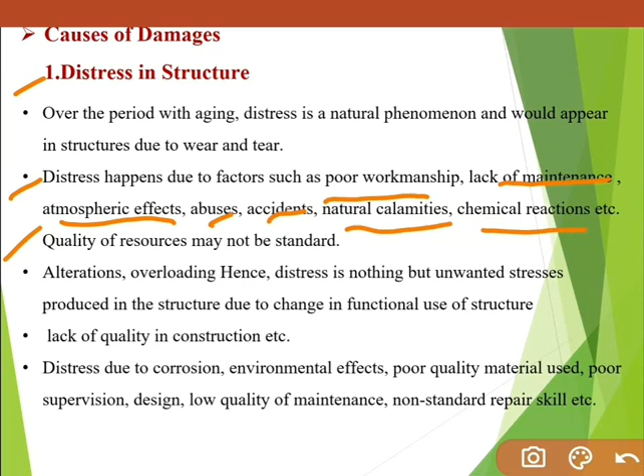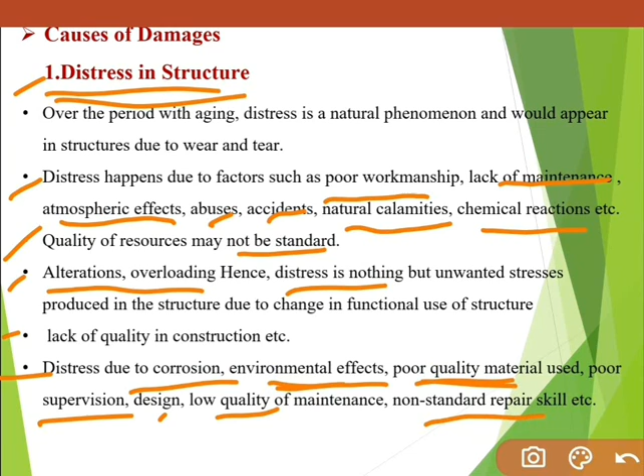Quality of resources may not be standard. Whatever resources you used while building your structure may not be standard. Alteration and overloading. This may also be a cause of the distress, and it increases the unwanted stresses which cause distress in structure. Lack of quality in construction. If you are not doing proper quality construction, it may tend to distress in structure. Distress due to corrosion, environmental effects, poor quality material used, poor supervision, poor design, low quality of maintenance, non-standard repair skill. So here are some additional causes of distress in structure. Okay, this is about the distress in structure.

Now let's see about the earthquake. This is the second cause which may damage our structure. Earthquake means motion at the base, and if motion at the base happens, the base of the structure moves, but the structure has a tendency to stay in its original position due to inertia. Because of the inertial property, the structure tends to stay in its original position, but its base moves because of the earthquake waves. So because of that, lateral pressure comes on our structural elements.

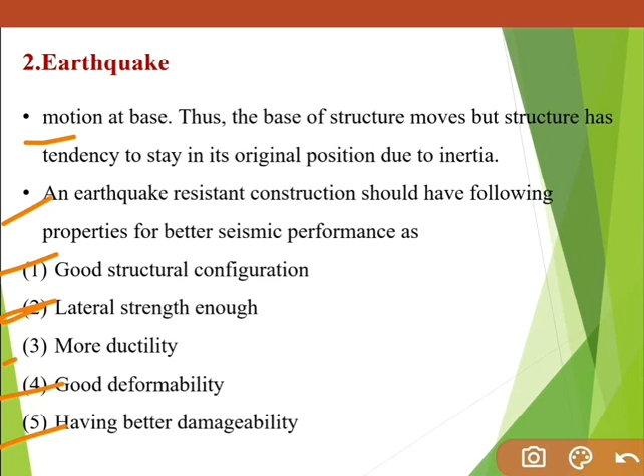An earthquake resistant construction should have the following properties for better seismic performance. If your construction comes under a seismic zone, our structure should have the following properties. Good structural configuration. Lateral strength should be enough, because if an earthquake happens, the structure will tend to move laterally. So that's why we have to provide a structure which is firm in the lateral direction. More ductility, the structure should be more ductile. Our structure should also be well deformable, and should have better damageability. So this is the second cause of damage.

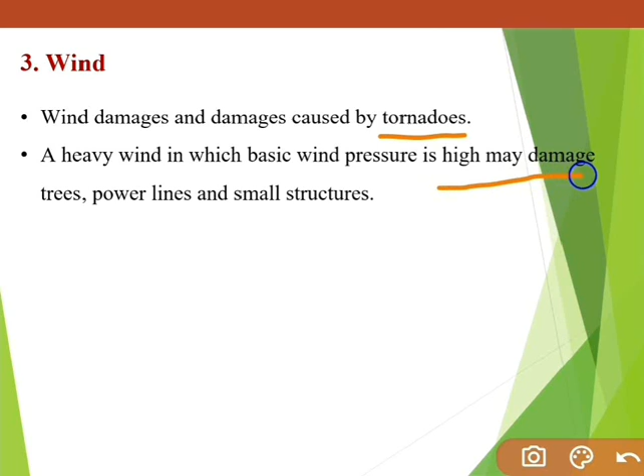Third, wind. A structure may get damaged because of high intensity wind, or by tornadoes. Tornadoes means high intensity wind. A heavy wind in which basic wind pressure is high may damage trees, power lines and small structures. So heavy wind may cause damage to trees, power lines and small structures.

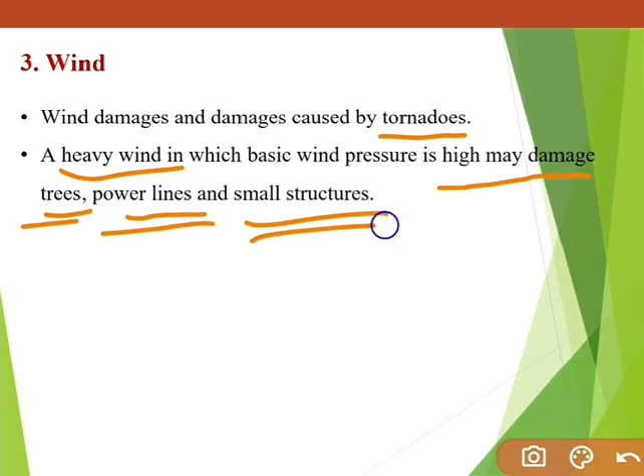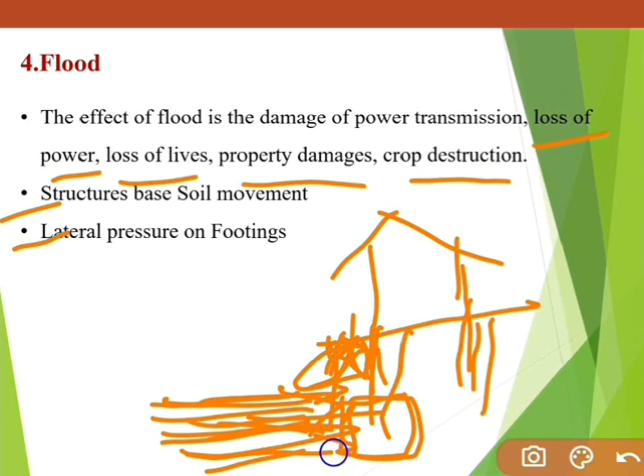Lateral pressure on footing. If flood flows like this, it may put pressure on footings. Here may be your footing and water is flowing like this. That means this water is putting lateral pressure on footings, and if footings get pressured, it may cause collapse of our building.

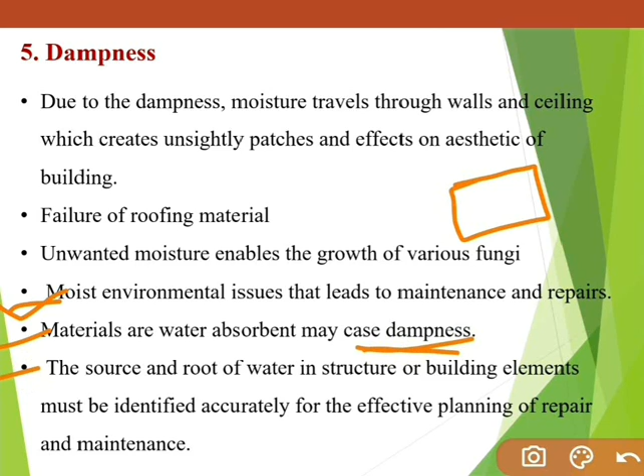The source and root of water in structure or building elements must be identified accurately for effective planning of repair and maintenance. If you want to plan repair and maintenance work very accurately, you need to identify the dampness source.

Now let's see about corrosion. How corrosion damages the structure. Formation of rust or iron oxide.

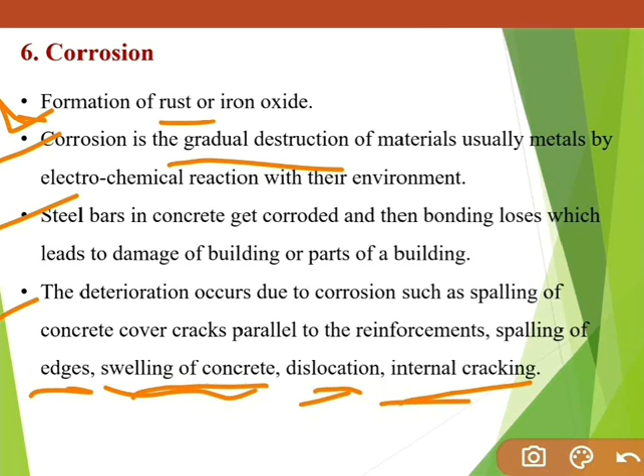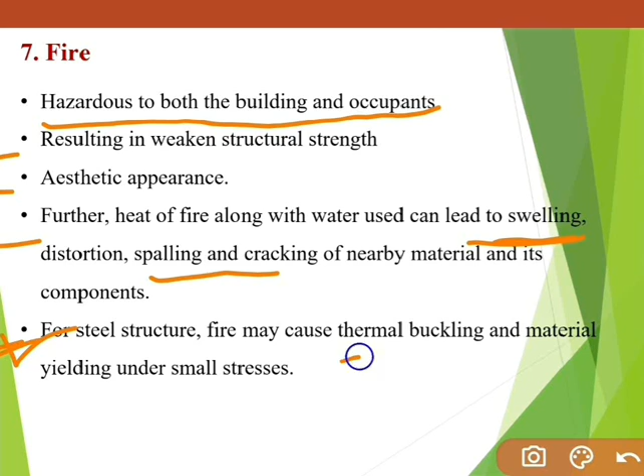For steel structures, fire may cause thermal buckling and material yielding under small stress. If your structure is subjected to fire, its yield strength is reduced, and under small stresses the components of the building get buckled.

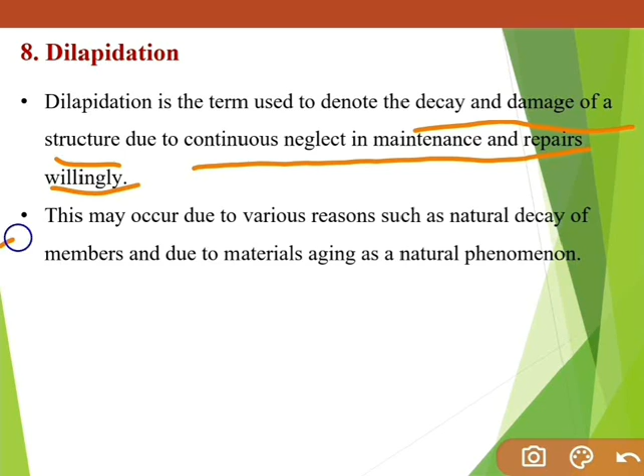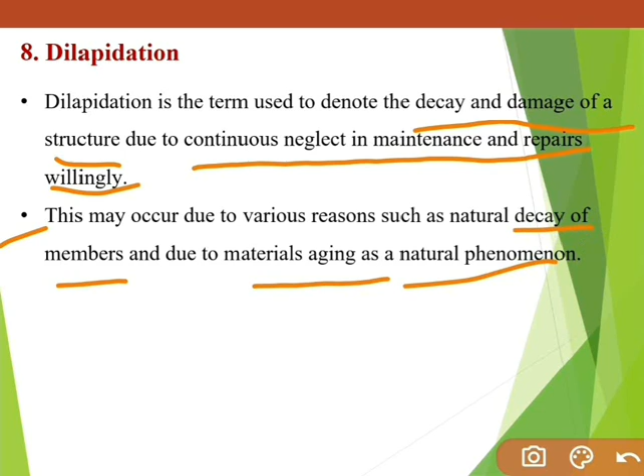The eighth cause of damage is dilapidation. Dilapidation is the term used to denote the decay and damage of a structure due to continuous neglect in maintenance and repair. Sometimes we do not concentrate on maintenance and repair work, and because of that dilapidation happens. This may occur due to various reasons, such as natural decay of members due to material aging, which is a natural phenomenon. So, why does dilapidation happen? Because of the decay of members and due to materials aging.